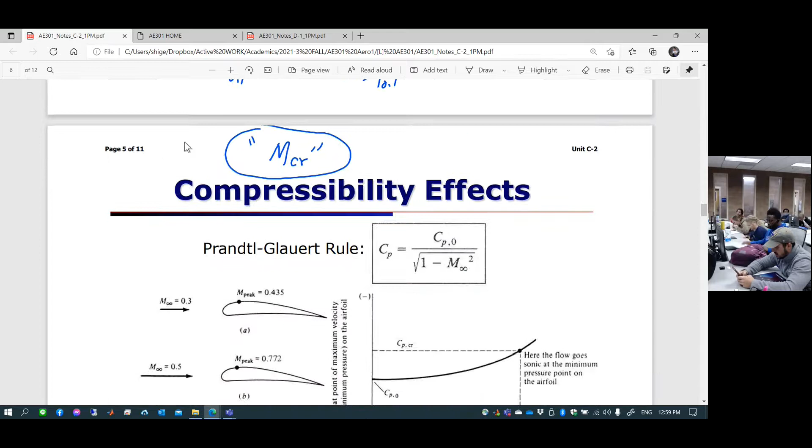Oh, well, I was here over break. Oh, well, then that's different. But that's something that bothered me, when he said you had 12 days to do the homework. 12 days, if you were here throughout break and had access to the full version of answers. If you left campus and didn't have access, the security version cannot solve those problems, you really could not work on it until you got back to campus. So you had up to 12 days, but you didn't really have 12 days.

And we were going to meet today to do the storage project. So you're starting on the project tomorrow? Yeah, we were going to start today, but one of my group members just said they can't meet. So, no, sorry, okay.

Yeah, projects in this, and I have the dynamics project. You need a personal thing, right? Yeah. Okay, Caleb is online. Can you hear me? Loud and clear, I got you. Okay, thank you.

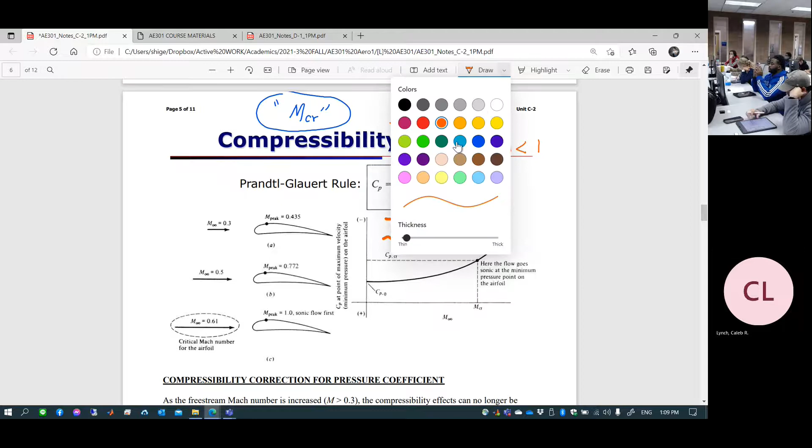So first of all, let's properly understand - we talked about in last class, CP distribution. Do you remember this is CP distribution? Do you know the equation for that? Isn't it the sign? It's gonna be.

Oh, that's if it's a flow over a cylinder, yes, but this is a flow over a cross section of a wing. What is the equation for that? Is it 1 minus V over V infinity squared? Oh, that's right - 1 minus that, velocity distribution divided by free stream velocity squared.

It's going to plot you this shape. That means this is the CP distribution over the surface. As a matter of fact, this is the velocity distribution over the surface. We're going to call this CP0.

So this is a CP distribution for low speed. That means if the flow is low speed, what is the governing equation? No - the governing equation that actually relates the velocity and pressure. What kind of equation do you know from this class? Your knowledge is supposed to be questioned in a job interview, people ask you this kind of question. Go ahead, what is the governing equation of this CP0 equation here?

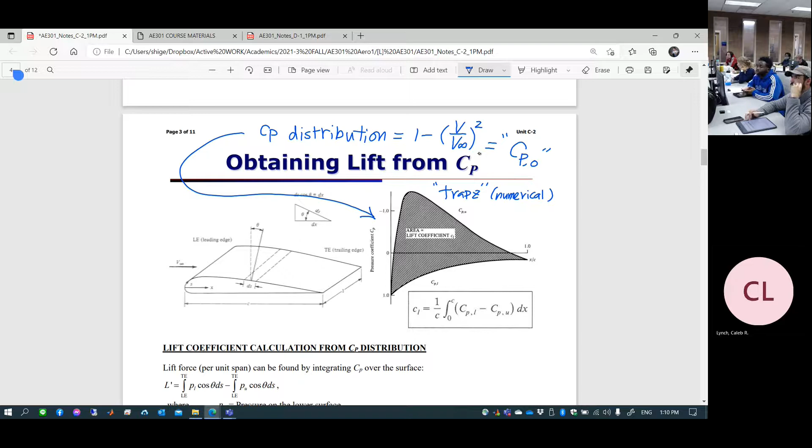Bernoulli's. Yes, Bernoulli's basically says that the density is a constant. You are less than 0.3 Mach number. Here, this is the low speed, right? Density is constant - that's the basic assumption of Bernoulli.

If so, velocity and pressure are correlated. That's called CP0. In other words, you are going to keep track of the pressure change over the surface. At the same time, you keep track of the velocity change over the surface. That means the lowest pressure point is the highest velocity point. At the same time, the highest pressure point is the lowest velocity. As a matter of fact, CP equals 1 means 0 velocity - this is the stagnation point. You can tell those things by looking at the CP plot.

This is called CP0, okay, so this is entirely based on Bernoulli. This is velocity 0 - this is the velocity, what is it, 0? Okay, velocity 0 point, stagnation point. This is where velocity is maximum, minimum pressure point, P min.

Static port is right here. CP is 0. If you make a drill hole right here, it's called a static port. Pressure is equal to the atmospheric pressure at that point. So you can tell two pieces of information at the same time, velocity and pressure, because those are correlated. Velocity-pressure coupling - that's called Bernoulli's equation, low speed aerodynamics.

Okay, big picture - understand big picture, because people ask you that kind of big picture question. If you don't understand the big picture, you don't understand anything. Job interview is always a big question - do you understand the basics? Oh yes, so that's my emphasis.

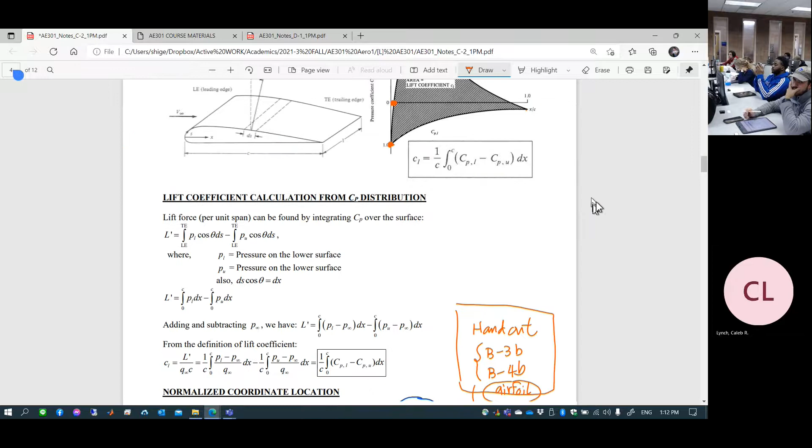So that's CP0, okay. Now what happens if you go for higher speed, that means more than 0.3 - still subsonic, but wow, wait a minute, density is no longer constant. So this is the CP0 you've been talking about - this CP0 is a CP distribution over the surface, assuming that density is constant.

However, your airplane is now flying more than 0.3 Mach number, density is no longer constant. You have to correct it, right? Correct your CP distribution every time when you measure the CP distribution over the surface for a given condition and angle of attack, because you're flying more than 0.3 Mach number. This is a correction equation, Prandtl-Glauert.

Okay, so this is the actual CP. If this Mach number is more than 0.3, you have to correct it. In XFLR5, do you have this kind of option, a special feature? Did you find this kind of special option in XFLR5 for Mach number more than 0.3? You just check mark it and turn on the Prandtl-Glauert equation. Did you realize it - you have to turn in Mach number, right?

If Mach number is kept at 0, it's CP0. But if you plug in Mach number, I don't know, 0.7, you turn in Mach number 0.7 here, all of a sudden you activate this equation.

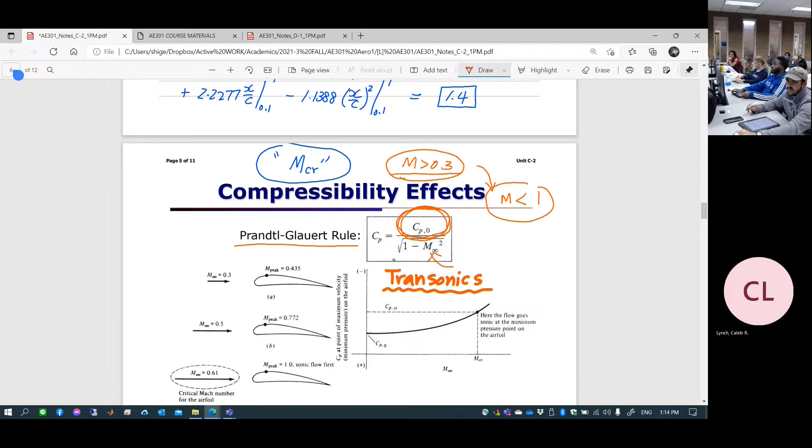CP0 is 1 minus V over V infinity squared. That's Bernoulli's equation.

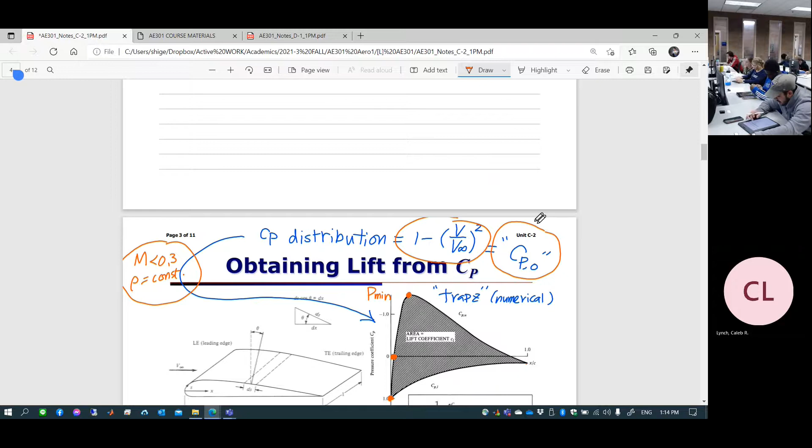Okay, so now you have to turn on or activate this equation in your XFoil software, and it uses this equation to correct your CP. Because CP0 can be computed by surface velocity distribution of a panel, but since you're flying more than 0.3 Mach number, those computed CP0 need to be corrected based on Prandtl-Glauert. This is called the Prandtl-Glauert rule.

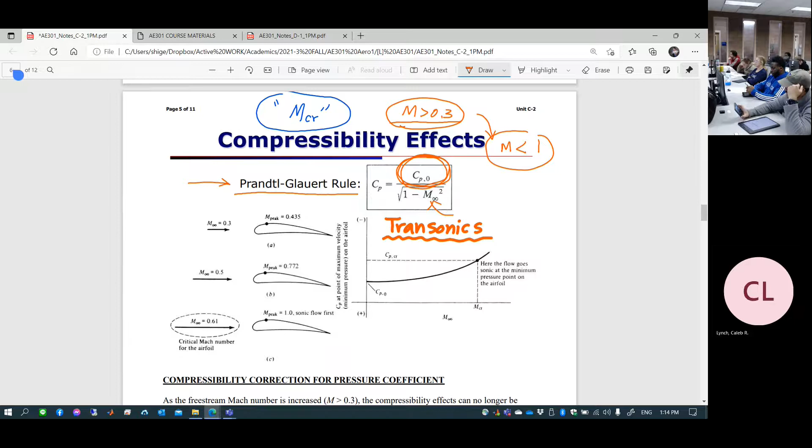But this is just an estimate. Estimate means this equation comes from past data and a data fit. This is not based on theory. So suppose if you want to stick with the theory, what kind of theory is available for more than 0.3 Mach number instead of using Bernoulli? What kind of equation do you use? The energy equation, there we go.

So one of the homework assignments in this unit, C2, I force you to correct CP in two ways. One, using Prandtl-Glauert. The other, directly apply the energy equation to do the exact same CP calculation, instead of using Bernoulli's equation, you use the energy equation version for CP computation. Can you do that? Yes, you can.

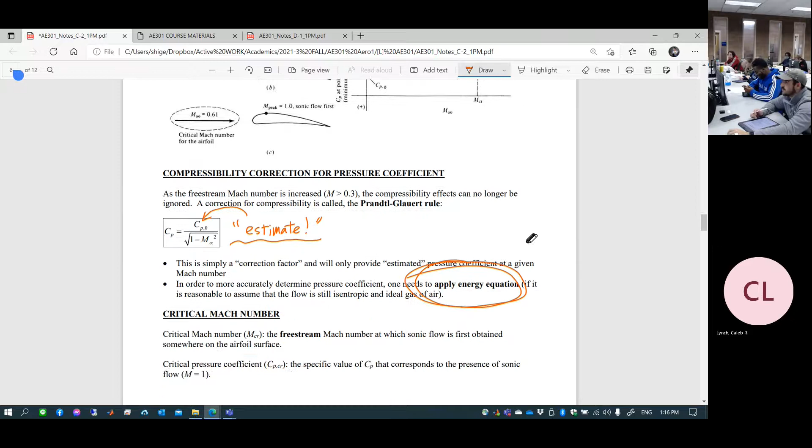Okay, where do you go back and take a look at it? Which unit? A5, yes, correct. Oh, you're good, Robert. Your response is so good today. I don't know why. Well, I shouldn't say that. I'm sorry, okay, don't take it personally. Your response is good. Let's stop there. Okay, so, my goodness.

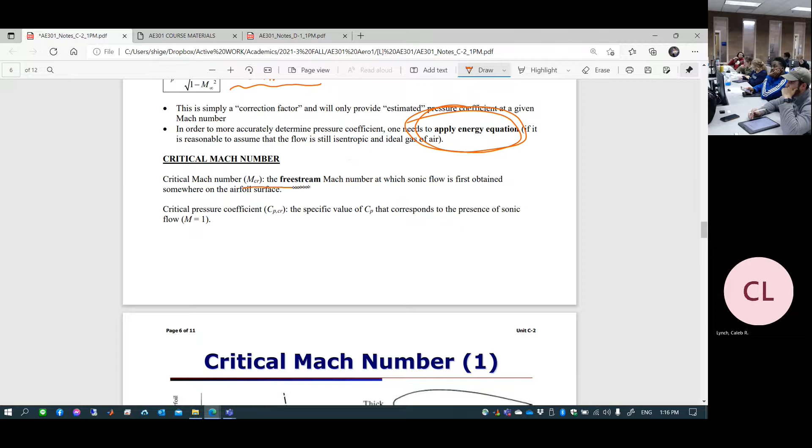Okay, so let's talk about critical Mach number today, MCR. So the concept of critical Mach number is the following: this is the choice of your airfoil, the cross-section of a wing. This is your flight Mach number. Your airplane is flying at 0.3 Mach number, okay.

Now this 0.3 Mach number flow gets in, maybe hits the stagnation point, maybe some of it flows over the surface and accelerates and flows away. This is the most accelerated point, pressure minimum here, Mach number is at its peak. That means the flow here is accelerated to 0.435, even though your airplane itself is flying 0.3 Mach number. Does it make sense? A portion of the surface of your wing is actually accelerated more than you are flying your airplane. Now if you continue accelerating, now you are hitting 0.5 right here, and the minimum pressure point, or peak Mach number, becomes 0.772.

Now you continuously accelerate, and here, this is the critical situation. Now this peak point where the pressure is minimum, now you have Mach number 1, sonic speed, even though you are still flying at 0.61 Mach number. This is called the critical Mach number, MCR. That means 0.61 is the critical Mach number. What does that mean? This is the Mach number where the minimum pressure point on the wing now becomes sonic speed.

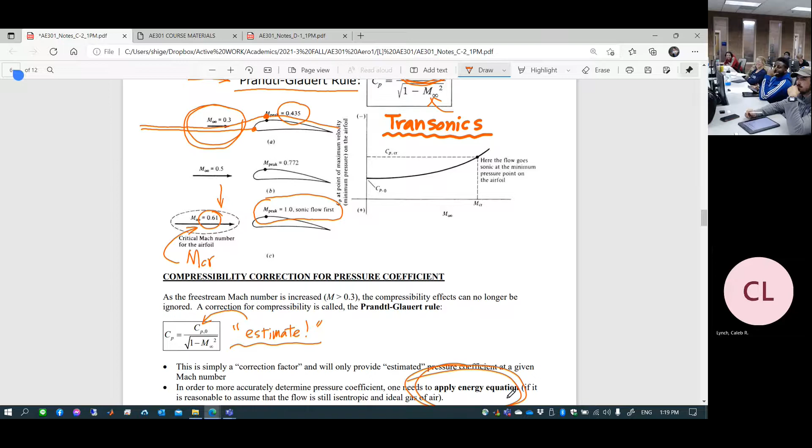Have you ever seen this airplane right next to the building? Well, there's a reason why, this is the only wing you can afford. Okay, anyways, so yeah, so this is the critical Mach number.

This is a design parameter. Every time when you design your airplane and claim that airplane is a high-speed airplane, the number one question people ask you is: what is your critical Mach number? Tell me about it. Design parameter.

If I'm sitting on a panel and you are a senior student presenting a senior design project for a supersonic airplane, my first question is: give me the critical Mach number. Oh, 0.5? Then I go like, give me a break, I'm gonna go home. What are you talking about? It's not a high-speed airplane at all.

So this is actually a very important design parameter. So do you want to have a high value or low value? As high as possible. As high as humanly possible, that's the critical Mach number if you want a high-speed airplane.

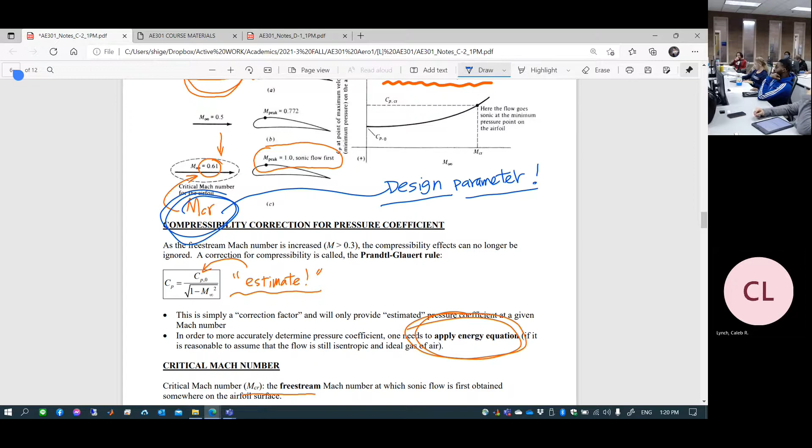Does reducing your wing camber increase your critical Mach number? There are lots of design choices to increase critical Mach number, we're going to talk about it a little bit later. But this is the design parameter, critical Mach number. So let's spend some time today to find out what it is and how we can determine such a thing. Let's take a look at the next page.

So in order to determine such a thing, first of all, let's find out the equation of critical Mach number.

So first of all, if you want to have a higher value of critical Mach number, which one do you choose? Thick one, medium one, thin one? Which one is the best choice to have a higher critical Mach number? Thin one, yes. Why is that?

Well, flow is going over each one of those. Starting from the leading edge, flow accelerates, and most likely very close to the leading edge you're going to establish a minimum pressure point, or the most accelerated location, which is the critical point, right? Those are the critical points. So that's the critical point of CP.

In other words, the lowest possible value of CP for each different shape. Those are just example values. So if you choose a thin airfoil, most likely the lowest possible CP is in the range of about minus 0.5. But if you choose the thick one, it's already accelerated well enough, so CP value is pretty low, minus 1.5 to begin with.

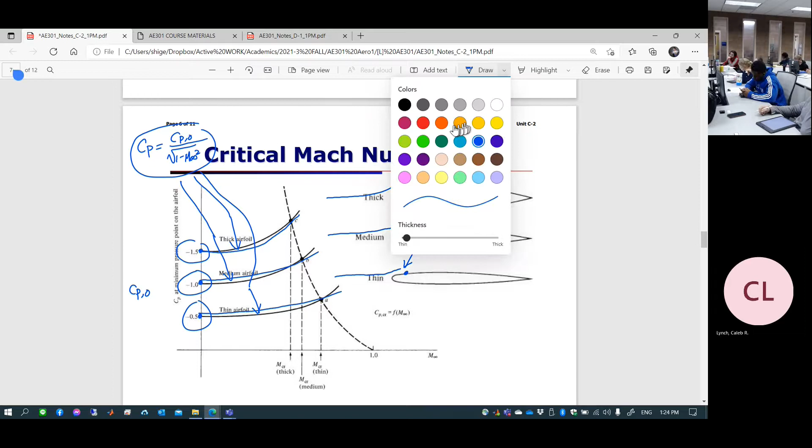So this curve is the Prandtl-Glauert curve. Then you want to find out the other curve here: this curve represents the curve of CP, CP-CR. So this is called critical CP. Critical CP is the CP at the critical point.

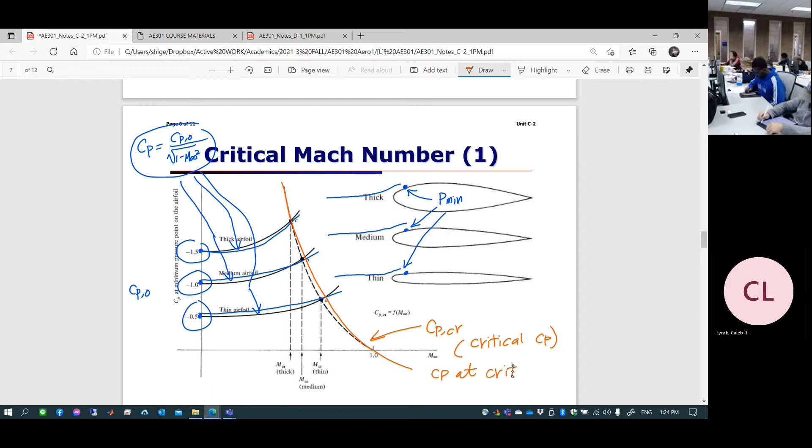The critical point is, of course, the pressure minimum location. What is the CP at that point? This is actually a function of Mach number also. So you plot the Prandtl-Glauert curve and the CP-CR curve, find the crossing point for each different shape, and find out at what free stream Mach number those two curves cross over. This determines the critical Mach number.

So obviously, if you have a thick cross-section, critical Mach number tends to be lower. If you have a thinner airfoil, critical Mach number tends to be higher, of course. You choose this one for a high-speed airplane.

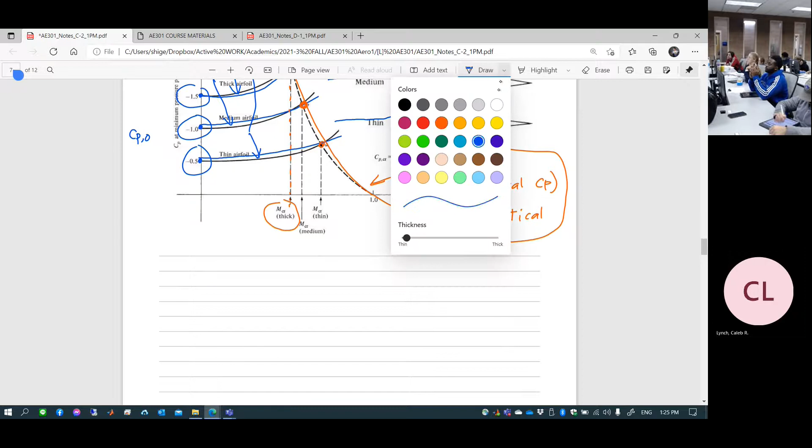This is a choice. So let's find out the equation of CP-CR as a function of free stream Mach number. This is actually a pretty simple equation. So we're going to start from here.

Starting from the definition of CP. Anybody? Very original definition of CP: CP equals P minus P infinity, over Q infinity.

Let's just change the format a little bit. This is P infinity over Q infinity, P over P infinity minus 1. I just changed the form a little bit. So this is the original definition of pressure coefficient. I'm going to call this equation 1.

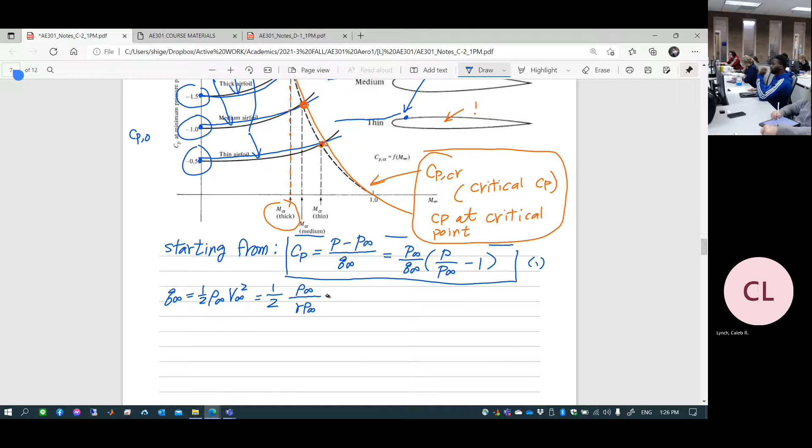Also, Q infinity is dynamic pressure of free stream, 1/2 rho infinity V squared. I'm going to also change this form a little bit: 1/2, rho infinity divided by gamma times P infinity, multiplied by gamma times P infinity, V infinity squared. You can do that, multiply and divide by gamma times P infinity. This is V infinity squared. This is going to be gamma P infinity divided by rho infinity, multiplied by gamma P infinity.

So Q infinity is equal to 1/2 rho infinity V squared infinity, and that's equal to 1/2 rho infinity over gamma P infinity, multiplied by gamma P infinity. I just multiply by gamma P infinity divided by gamma P infinity, it just cancels out. I can make up something because I have a purpose later, you're going to find out why. Anyways, let's move on.

Also recall free stream speed of sound. Let's take the square: A infinity squared equals gamma R T infinity. By the way, isn't this gamma times P infinity over rho infinity? Note, P equals rho R T, so P infinity is equal to rho infinity R T infinity.

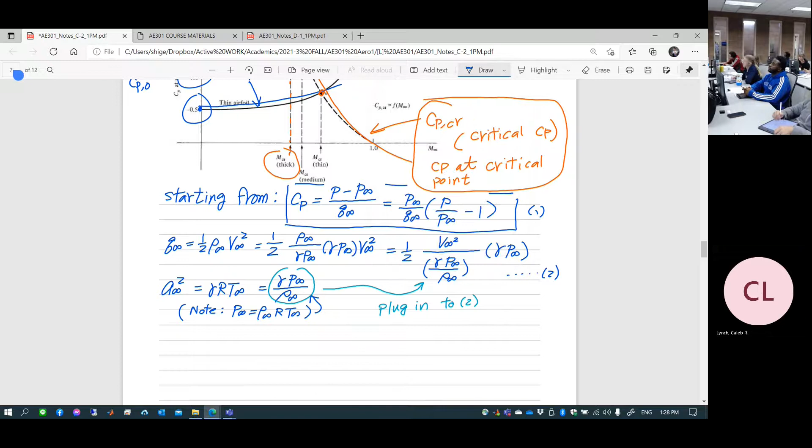Now you should probably realize this thing can be plugged in here. So this is plugged into equation 2. Then equation 2 now becomes: Q infinity, free stream dynamic pressure, is 1/2 times V infinity squared over A infinity squared, times gamma times P infinity. What is that? Mach number squared.

Because you could also plug it into the gamma P infinity, making A squared times rho infinity equal gamma P infinity, but I don't want to do that, because I want to cancel and have this form: 1/2 gamma over 2 times P infinity times Mach number infinity squared.

So this is the expression of free stream dynamic pressure in terms of free stream Mach number and free stream static pressure. That's what I wanted to have for a moment. Okay, just stay with me, let's think about this.

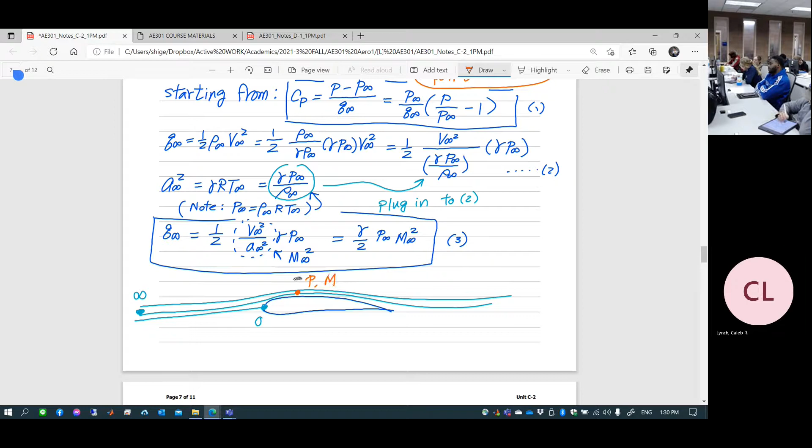This is your airfoil, and then you have streamlines, probably multiple streamlines. One of the streamlines goes straight into the stagnation point, right here. So right here is free stream infinity. This is a stagnation point, point 0. And let's just consider this is a critical point, where pressure is P and Mach number is M. That's the critical point.

Now right here, Mach number is M infinity, this is your flight Mach number, free stream, and pressure is P infinity, the atmospheric pressure. Right here is the stagnation point: what is M0? Zero, of course, this is velocity 0. P0 is the total pressure right here at the stagnation point.

So having said that, do you remember the relationship between the stagnation point and the free stream, and this location, as a function of Mach number in between? Do you remember the relationship for those? I think this will bring you back to earlier in the semester when we talked about airspeed measurement. Do you remember this equation?

So this is a relationship between stagnation point and the location, in this case free stream. But any location between stagnation point and any other location is a function of the Mach number at that location. This comes from the energy equation. It's the relationship of pressure between the stagnation point and a location where you know the Mach number, because at the stagnation point, Mach number is 0.

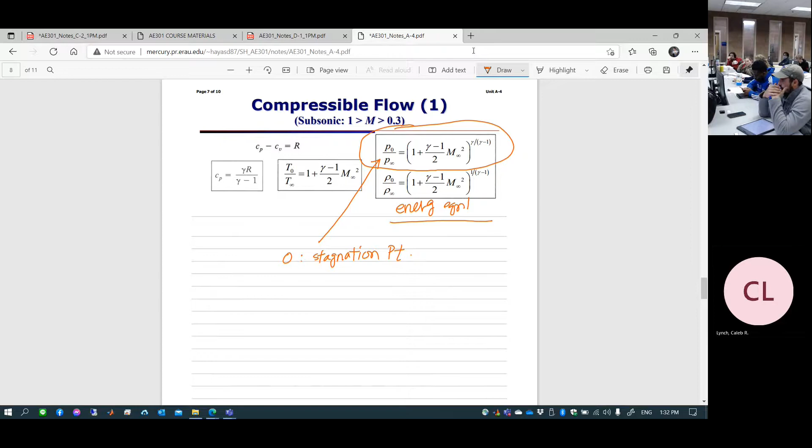Okay, let's apply this equation. Next page. I'm going to apply that relationship between free stream and the stagnation point, and stagnation point to this location. Recall from unit A4, this is essentially coming from the energy relationship, the energy equation.

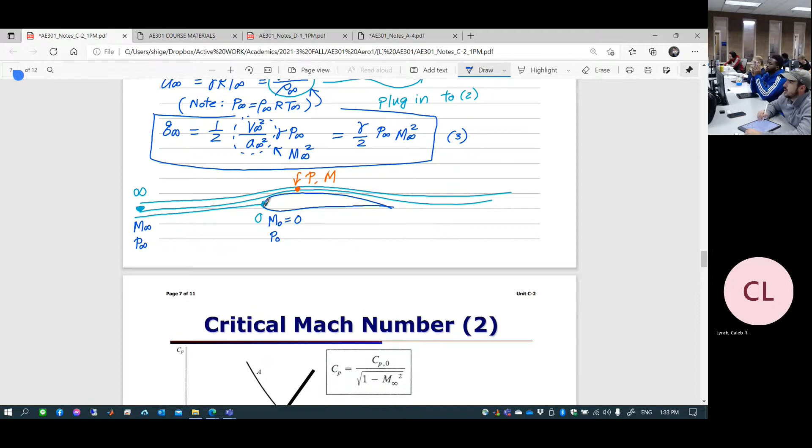Between stagnation point pressure P0 and the pressure at the critical point, I'm applying this equation here and here. At the stagnation point, Mach number is 0; at the critical point, Mach number is m. So now P0 over P equals 1 plus gamma minus 1 over 2 times Mach number at the critical point squared, to the power of gamma over gamma minus 1.

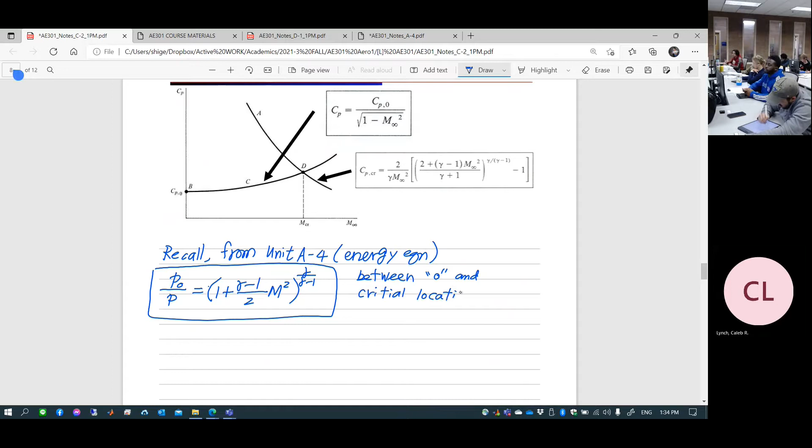This is between stagnation point and critical location. And also you can do the same thing. Let's call this equation 4.

Also you can say between stagnation point and free stream, P0 over P infinity equals 1 plus gamma minus 1 over 2 times m infinity squared, to the power of gamma over gamma minus 1. Is that correct? So this is equation 5, between stagnation point and free stream.

So I guess the question is, can we combine those two to get a pressure ratio between the critical point and the free stream, P over P infinity? Can we combine those two? How? Multiply by the flip-flop of the other, right? P over P0, the flip-flop of equation 4, multiplied by equation 5, P0 over P infinity. We can do that - in other words, you can cancel out P0, P0.

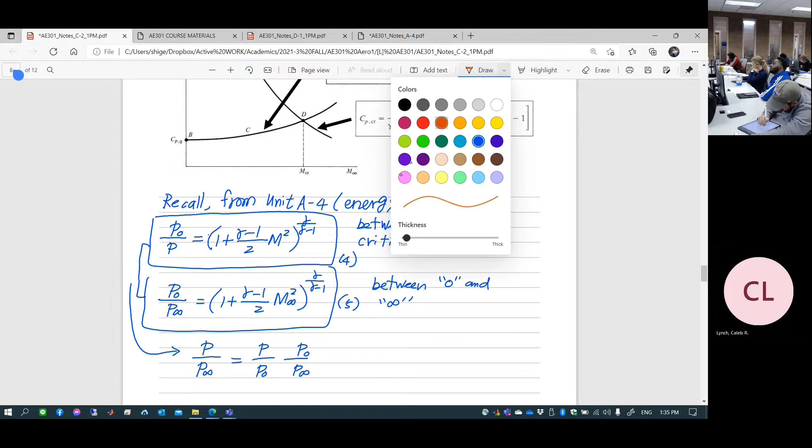Now you have an equation something like this: 1 plus gamma minus 1 over 2 m infinity squared, over 1 plus gamma minus 1 over 2 m squared, to the power of gamma over gamma minus 1. Let's say this is equation 6.

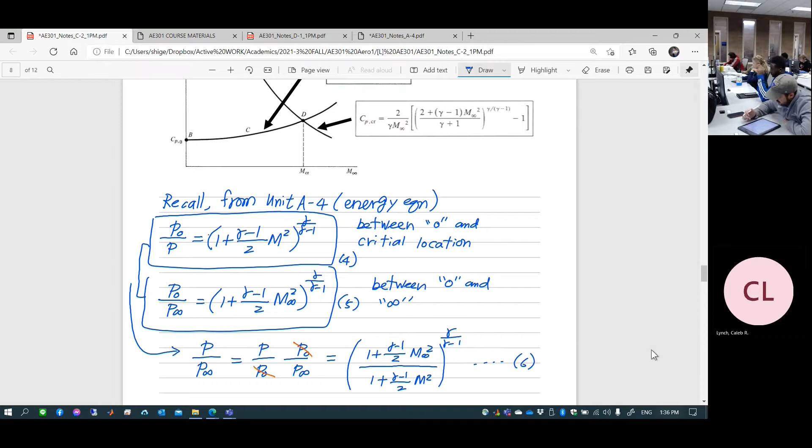Now what? You can plug it back into equation 1. Look at that. So now what? You can plug in equation 6 in here. Let's recall equation 1 all the way from the previous page, and just plug equation 6 into equation 1.

You can say Cp equals P infinity over Q infinity. Also, for Q infinity we have another equation - Q infinity is equation 3, right? So you also need to plug that in. Take a look at equation 1: you plug in P over P infinity from equation 6, and Q infinity from equation 3, back into equation 1.

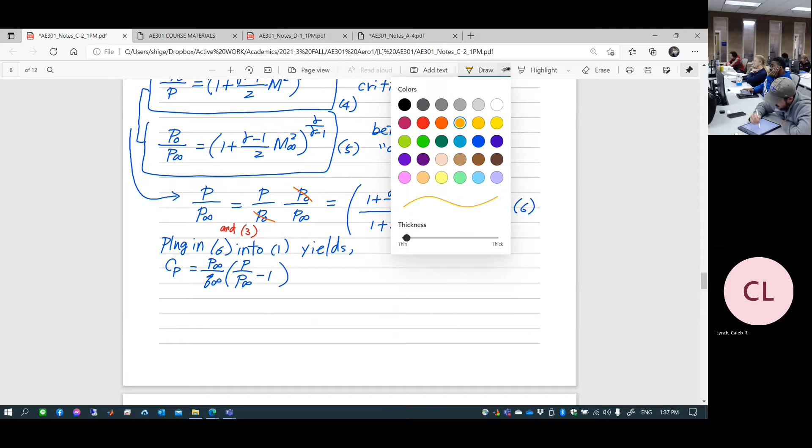Let's do that - plug 6 and 3 into equation 1. Equation 1 says Cp equals P infinity over Q infinity times, P over P infinity minus 1. Now, equation 6 and equation 3 plug in. What do you have? This is a big equation: P infinity over gamma over 2, P infinity Mach number infinity squared, bracket, 1 plus gamma minus 1 over 2 m infinity squared, over 1 plus gamma minus 1 over 2 m squared, to the power of gamma over gamma minus 1, subtract 1.

Here we go. So what am I doing? What is CP critical? CP critical means CP when Mach number equals 1, isn't it? So let m equal 1.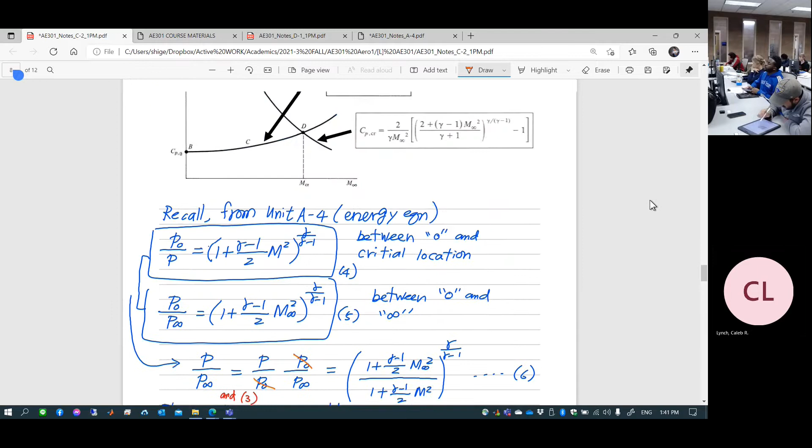So what do we do? Use this equation to plot out here. So this is the CP critical equation. This is the CP at the critical point, which is the most accelerated location over the wing.

Then this is the Prandtl-Glauert equation, starting from CP0. Then find the crossing point—that is your critical Mach number. So this is the classic technique to determine critical Mach number.

Whenever you design a high-speed airplane, you have to do this and present your results of critical Mach number so you can claim it's designed for high-speed use. If the critical Mach number is pretty low, you're not going to convince anybody. How high of a critical Mach number can be? It can be as high as close to 0.8.

To be considered high speed? Yeah. The P-51D Mustang has a critical Mach number of 0.76, which is pretty darn good. That means, technically speaking, if you remove that propeller engine and replace it with a jet engine, it could be a pretty good high-speed airplane.

Anyways, go ahead. Basically, as the cross section becomes basically a line—is that when your critical Mach number approaches 1, if you just have the thin airfoil theory? So the thinner it gets, is that the closer it gets to 1?

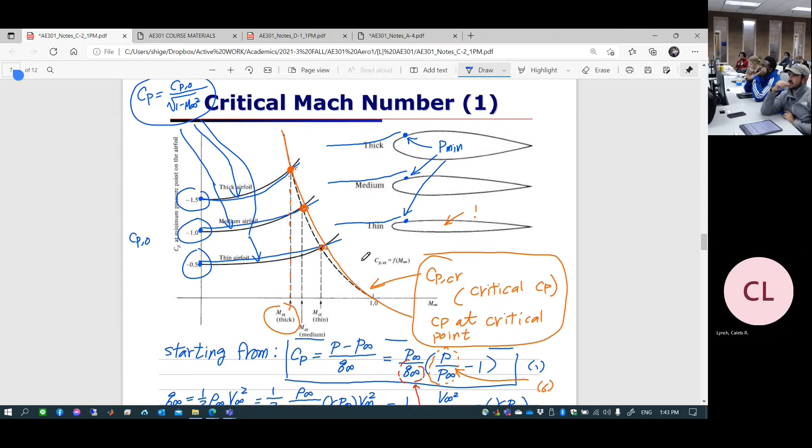Closer gets to 1—what do you mean, one is what, as Mach number one? Yeah, your critical Mach number. Critical Mach number cannot be one. Okay, so what's the highest we could possibly get, if it's a completely flat plate? That's what I was saying.

If it's a completely flat plate with zero angle of attack, it's not an airplane because you're not going to create lift. But if it's a completely flat plate for high speed, it's going to probably induce instant separation at the leading edge. It's not a very good design anyway—the flat plate is, especially at high speed.

I was just thinking theoretically. But—theoretically, you mean thin airfoil theory? Thin airfoil theory is limited only to potential flow. High speed is not that easy because the physics is more complicated, right?

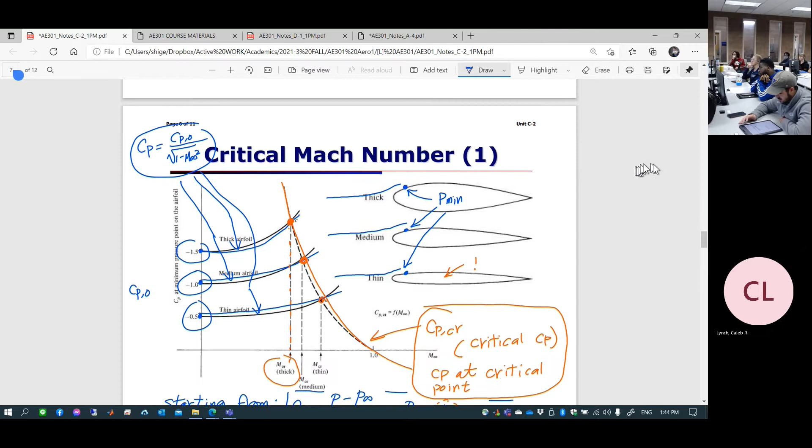Now, in order to actually analyze high speed, you have to know the energy equation. That means you need complete information on the temperature distribution—that is the energy equation, right? That is not easy under any condition. That's why the energy equation could possibly be theoretically sound, but is it useful? Probably not, most of the time.

Now, a completely flat plate is a different story, but it doesn't create lift unless you create some camber. So here we go—that's actually an important thing. Probably the very beginning of the development of high speed is a thin flat plate bent. That's probably the beginning, yeah.

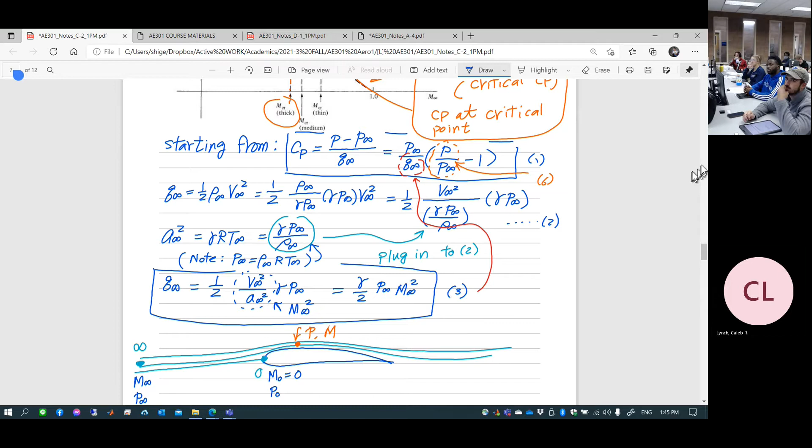So that's actually not such a bad idea. But completely flat means you're not going to create any lift unless you pitch up. Once you pitch up a little bit, you induce separation, right? That's not very good. But bent a little bit with camber, no thickness—that could end up being your design choice for your senior design project, and people might scoff at it, but it could be the best choice kind of. I don't know, who knows? Okay, go ahead.

Any question? So you plugged in one here, and then finished up your math calculation. Finish up your math, plug in one here.

This equation becomes this. You can simplify it, okay? Any other questions? Let's move on.

So the next thing is critical Mach number. Obviously, you are still flying subsonically at the minimum pressure point, the critical point. You're going to experience sonic speed, and then if you go beyond that, the drag coefficient starts to increase rapidly.

This is called drag divergence, something called MDD. The drag divergence mechanism is the following: if you go beyond the critical Mach number, you're going to start developing a supersonic region, at least partially, over the surface.

This creates a normal shock wave to adjust the supersonic flow into subsonic flow. This normal shock wave actually separates everything behind it. This is called shock wave induced flow separation, so the entire surface behind the shock wave is all separated.

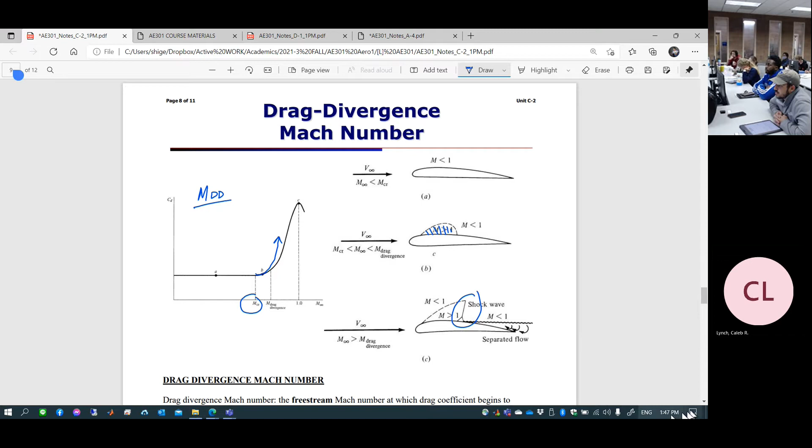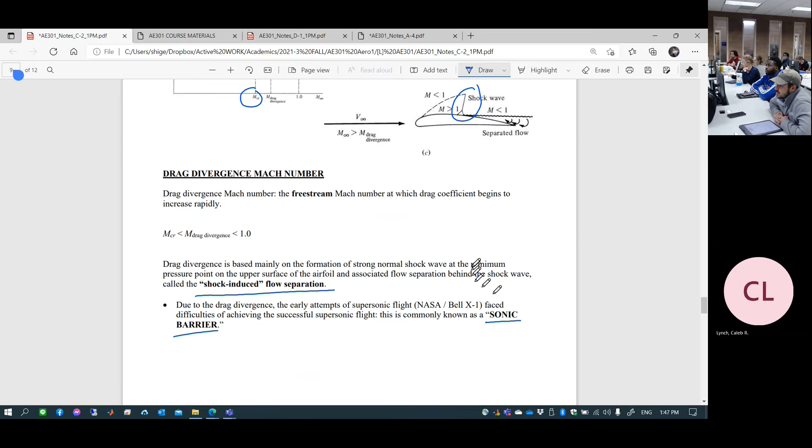Nowadays we do know how to deal with it. So this is one such solution: the supercritical airfoil. By design, you are going to avoid acceleration on the top surface.

Do you know what I'm talking about? So this is a conventional airfoil. Flow really accelerates, establishing a minimum pressure point right here. Now, if you make the top surface almost completely flat, that means you're not going to accelerate the flow on the top surface.

Take a look at that, most of the top surface flow is not accelerated, so you avoid creating a minimum pressure point right here. So you can actually avoid forming the shock wave. This is the supercritical airfoil.

Almost all transonic airplane cross sections today use the supercritical airfoil. This is a first application of it, the C-17 Globemaster 3, patented by McDonnell Douglas. This is an airplane right now. Brian, go ahead.

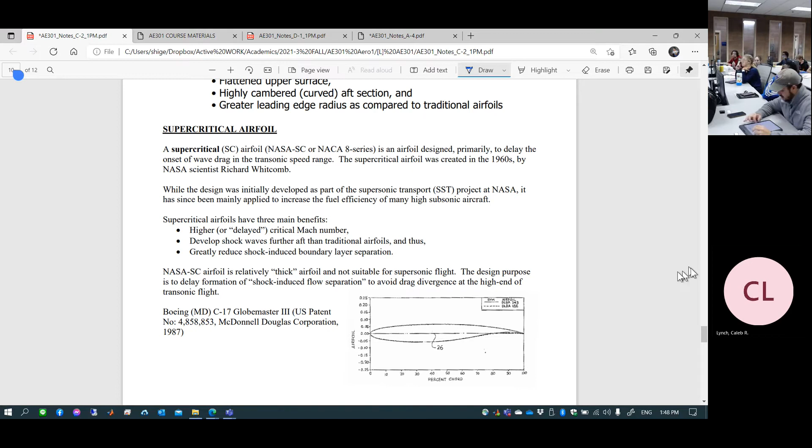If you look at the cross section, it almost looks like an upside down airfoil. Does it still produce lift upside down? Not quite. Actually, the top surface is intentionally made flat, but the bottom side is curved out, creating intentionally a higher pressure zone on the bottom side, so that most of the lift is supported from the bottom.

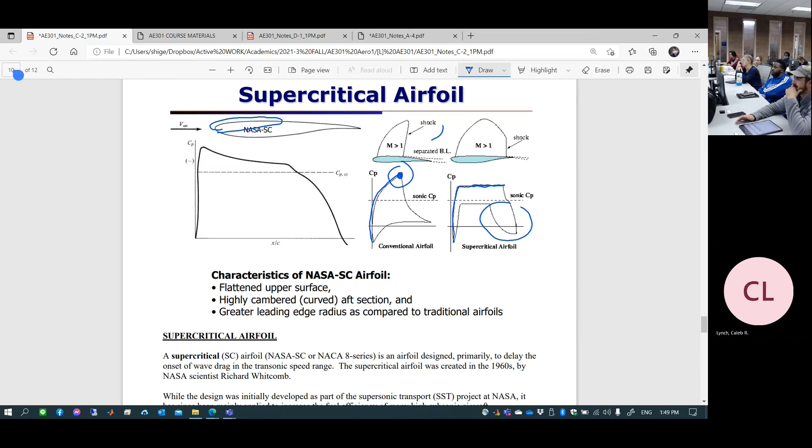So you're basically saying it's a completely flip-flop idea of how to create the lift, right? So having these supercritical regions where Mach is greater than 1 forms a shock, that's okay as long as the shock wave is at the very end of the body. Usually this formation of a shock wave is completely avoided. Completely, you're not going to create any shock wave.

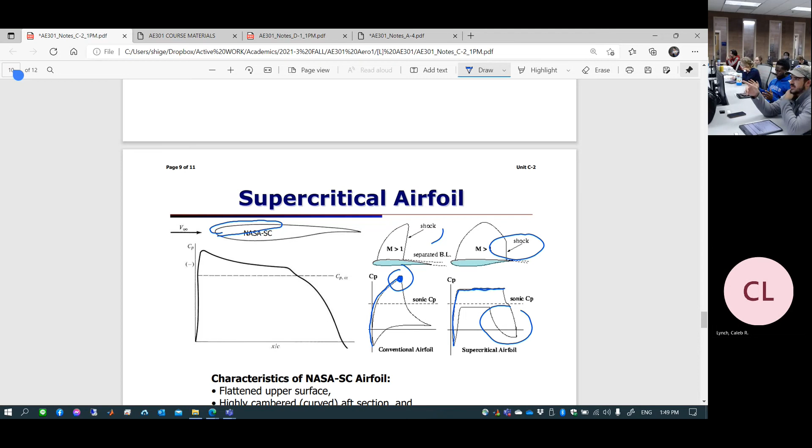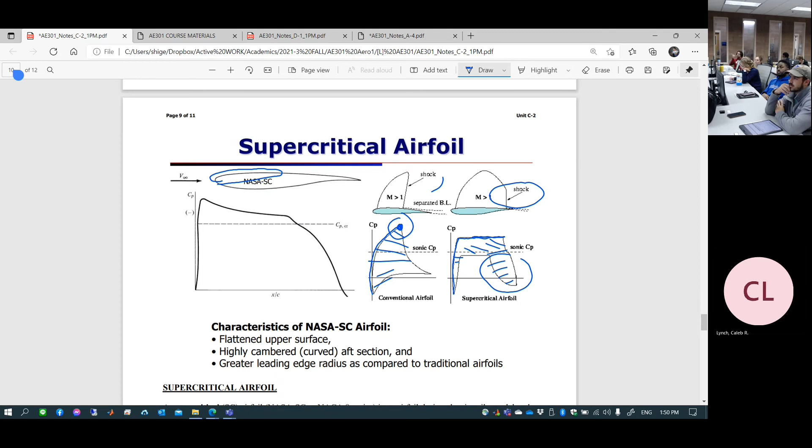Do these airfoils make the same or comparable amount of lift to conventional airfoils, or do you have to be going a lot faster? I guess so, if you take a look at the area, because this area essentially represents the lift coefficient. So the question is about the same area you create, but which portion, the high pressure zone or low pressure zone, contributes more to the area? The amount of lift only depends on the area that you produce, so it's about the same, right?

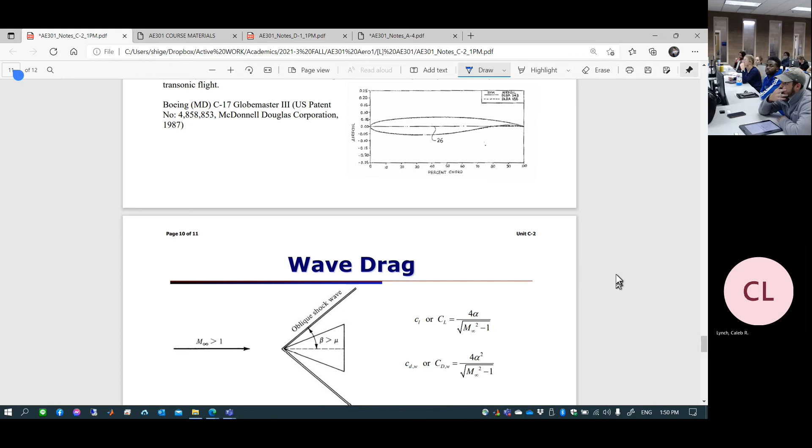So now, we couldn't finish up Unit C2, but on Friday we're going to finish up Unit C2. Take a look at the high speed, this is actually supersonic. On Friday, we're going to take a look at supersonic, just an introduction to it, and then we're going to get into Unit D1, which is 3D wing, on Friday.